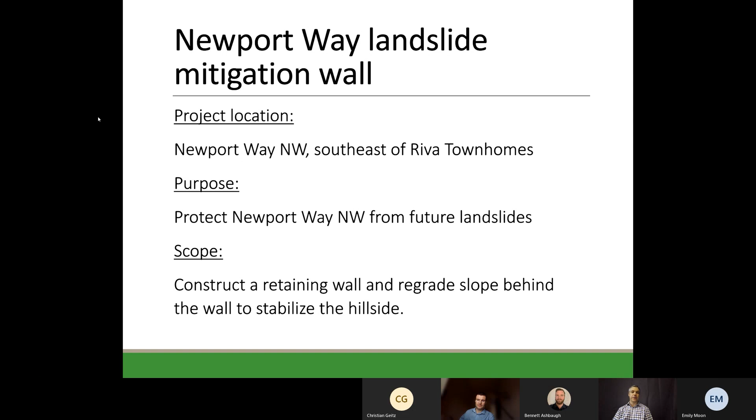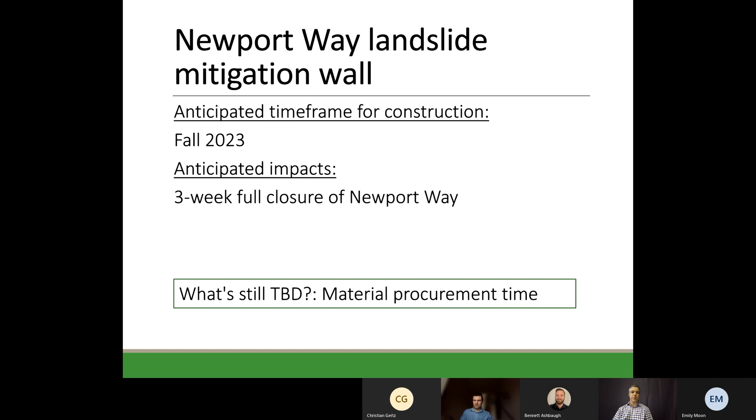Currently, the city is designing a project that will construct a retaining wall and regrade the hillside behind it to protect Newport Way from future landslides. Construction of the retaining wall is expected to occur this fall. During construction, a 3-week full closure of Newport Way is anticipated to be required in order to build the retaining wall. This schedule depends on the procurement of the materials needed.

This is a picture of the landslide in 2022 that closed Newport Way, which we're hoping to prevent with the construction of the Newport Way retaining wall.

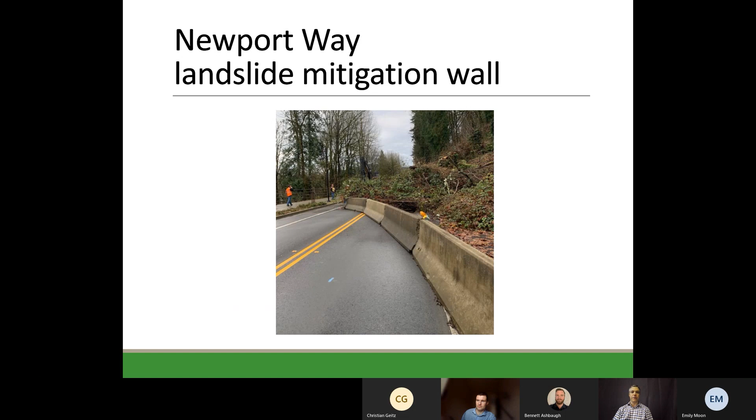Hi, I'm Matt Ellis, Utility Engineering Manager for the City of Issaquah. Tonight I'll be talking about the WSDOT Culvert Replacement Project. In the coming years, the Washington State Department of Transportation will be replacing non-fish-passable culverts and barriers along state-owned routes. This is required by federal injunction. Work will occur at 4 locations in the city, which I'll get to in a minute.

Work will impact I-90, SR 900, Exit 15 on and off ramps, Northwest Sammamish Road, West Lake Sammamish Parkway, Newport Way, and Gilman Boulevard. It will require new roadway alignments, new bridges, a roundabout at 1 location, new stream alignments, and relocation of city and private utilities.

WSDOT will be hosting an open house in the next few months. The date has not been scheduled yet, and WSDOT will be reaching out and providing a link to a website that will give specific updates for this project in the near future.

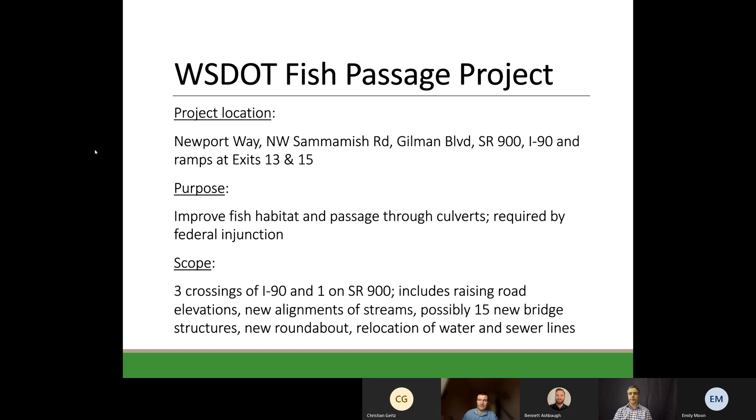The anticipated time frame for construction is open-ended, but right now they need to get all work done by 2029. So the plan is to complete all construction work between 2024 and 2029.

The impacts will be road closures, detours, and possible short-term utility impacts on all segments of the roadway, including the freeways, and on local streets including Newport Way and Northwest Sammamish Road.

What's still unknown: WSDOT has not yet selected a design-build contractor. They plan to do so in late 2023 or early 2024. Once a contractor is on board, we'll have a better understanding of timing and schedule. There are still a lot of unknowns and things we're working out with WSDOT, including design and construction elements and details currently being coordinated with the state.

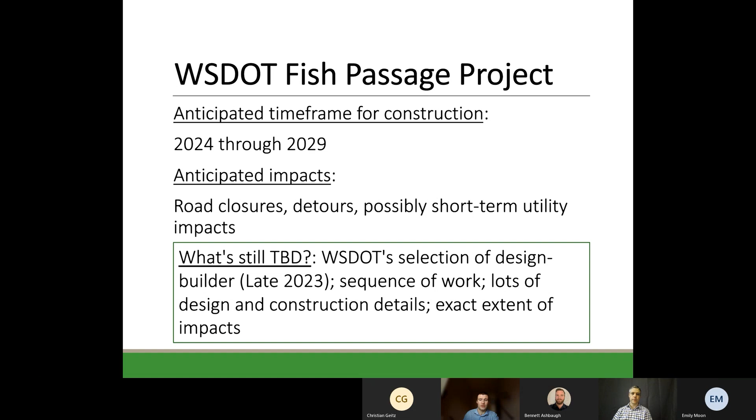Here are the 4 locations within the city. We have Newport Way on the west end. We have West Village Park and Schneider Creek right in the middle. We have tributaries to Tibbetts Creek, which impact both Gilman Boulevard and SR 900 and the on and off ramps right in the middle. And then at the very south end, there is a culvert replacement of Tibbetts Creek on SR 900, just south of the city limits.

So here's the first location.

This is the very preliminary design of the Lewis Creek culvert replacement. Right now, the orange line is the existing alignment of the culvert, and they are planning to replace that with 4 bridges: one on Newport Way, one on West Lake Sammamish Parkway, and 2 on the freeway.

To facilitate the design, you can see that the new stream alignment goes right through the old off-ramp, and they're proposing a roundabout at the Lakemont Orchard driveway to help facilitate the new alignment.

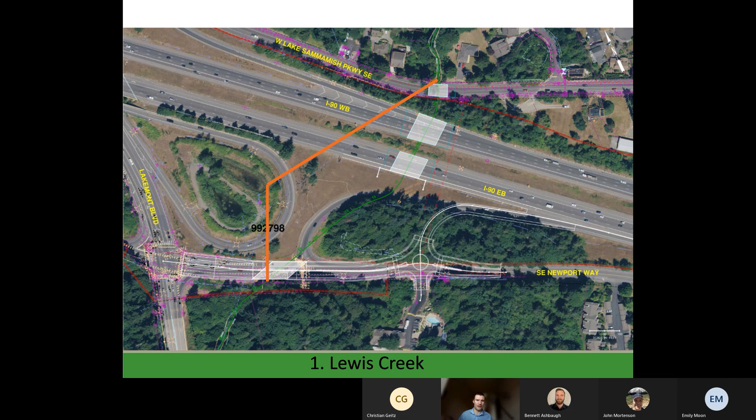This work will require change of use or realignment for our city water line, as well as the Cascade Water Alliance water transmission main, as well as other utility relocations.

Here's the second location. This is West Village Park Creek and Schneider Creek. The 2 orange lines are the existing alignment for the 2 streams. What they're proposing to do is put in a bridge at Newport Way for West Village Park on the east side, and then put a new stream alignment between Newport Way and the freeway for that creek.

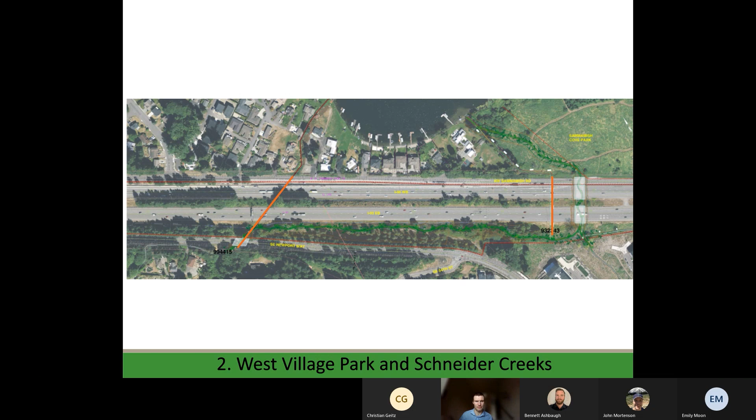That will then travel eastward to where it intersects with Schneider Creek, and the 2 streams will merge and go under the freeway and Northwest Sammamish Road before it outfalls into Sammamish Cove Park and enters Lake Sammamish. This work will require replacement of some water lines as well as a city sewer line, and will impact both Northwest Sammamish Road and Newport Way.

Here is the third location. This is the tributaries to Tibbetts Creek. This will have impact to SR 900, all the on and off ramps at that location, as well as I-90 and at 2 locations in Gilman Boulevard.

This one will have less impacts to utilities, but will have some major disruptions and impacts to traffic as they try and figure out sequencing. WSDOT has not quite figured out all the sequencing or how this will be phased. That will be determined with the design builder on board.

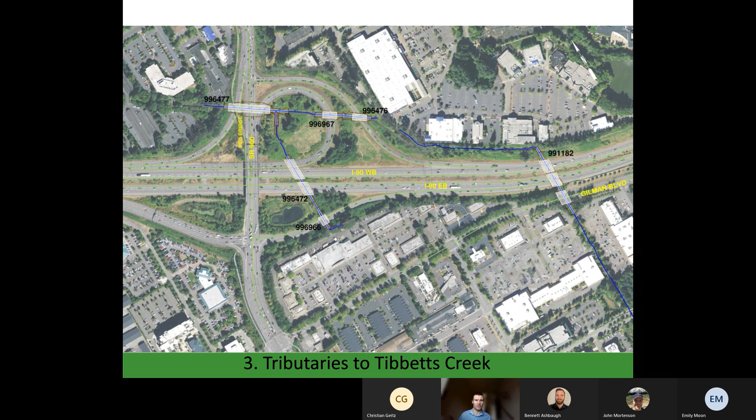As well as WSDOT utility culvert replacement projects, the city will be replacing a bunch of utility projects along Newport Way. Some of this will be for the WSDOT work, and some will be for city projects.

We will be replacing water lines from Northwest West Village Park Drive to Southeast 54th Street. We'll be installing a pressure reducing valve and intertie to the Bellevue Issaquah pipeline. The purpose of these projects will be to provide redundancy to Newport Way for water and improve fire flow, and reduce reliance on water provided through Bellevue.

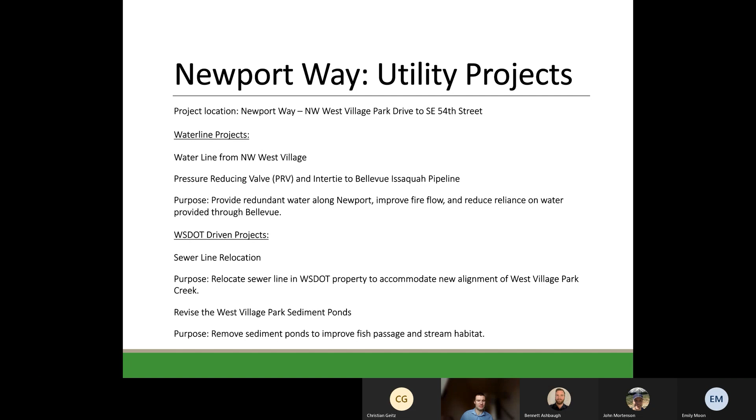There will also be 2 projects driven by the WSDOT culvert replacement project. We'll be replacing 1,400 feet of sewer lines currently located on WSDOT property next to Newport Way to help facilitate their new stream alignment. We will also be looking at replacing sediment ponds located on West Village Park Creek, adjacent to the outlet to Newport Way.

The waterline projects, we are anticipating to complete this work in 2027. The sewer line work for the WSDOT culvert replacement will be between 2025 and 2026, as well as the sediment ponds will also be in 2025 and 2026. We are anticipating single lane closures for all these projects.

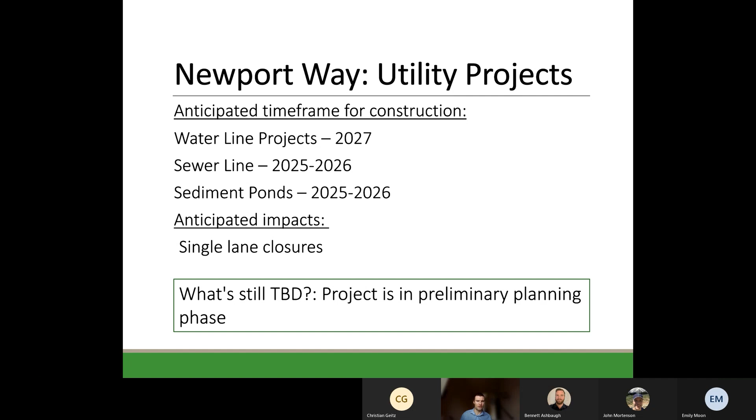Here is a picture of all the utility projects. They're kind of all in the same location. On the east end, we have Newport Way PRV and master meter. In the middle, we have the Newport Way water main replacement project. We also have the sewer line relocation right above the water line, and the sediment ponds right there at West Village Park Creek. The orange overarching image is the WSDOT culvert replacement work for West Village Park and Schneider Creek.

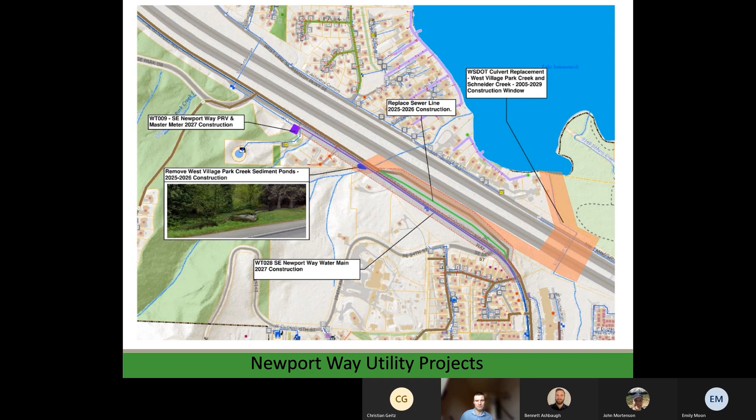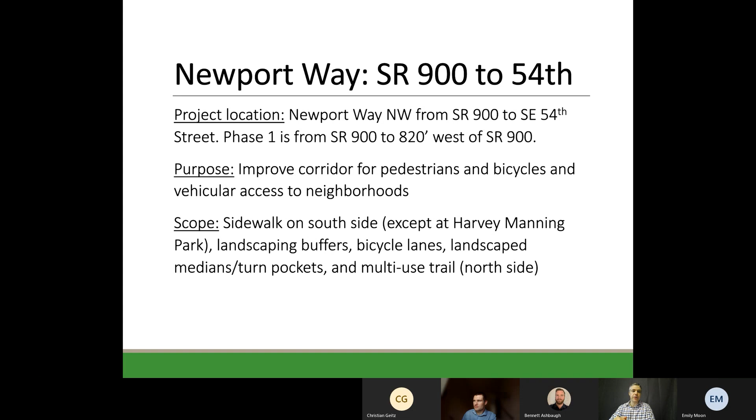The Newport Way project, located between SR 900 and Southeast 54th Street, is a corridor project. This project will improve Newport Way for bicycles and pedestrians by constructing new bicycle lanes, a multi-use trail, sidewalk, and planter strip to separate the pedestrians from the vehicles. This project will also improve vehicular access to neighborhoods with a new center median and turn pockets.

The next project is King County's Precipice Trailhead, also known as the Big Tree Ridge Trailhead. This project is located on the Cougar Mountain side of Newport Way, approximately a half-mile northwest of SR 900. This project will construct a parking lot for trail users to access the trail system. Construction of the new parking lot is expected to begin in the second quarter of 2023.

Impacts during construction include no access to the trailhead during construction and intermittent impacts to traffic on Newport Way, with flaggers controlling traffic and single lane closures. The item that still remains to be decided on this project is what the permanent restroom facility will look like. Here is a map showing where the new trailhead parking lot will be located.

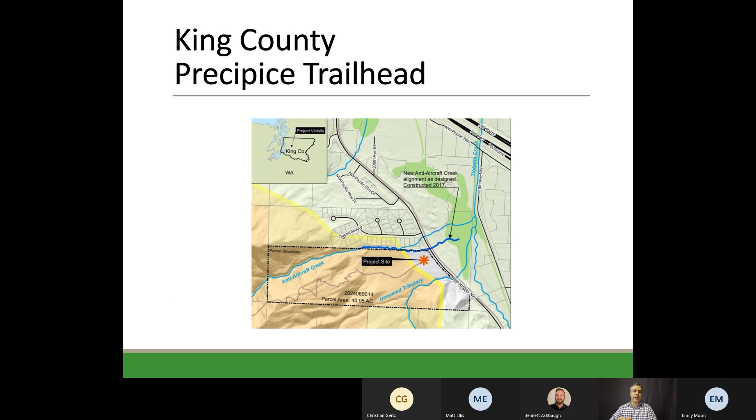There's two private projects that I'll be discussing with everyone tonight. The first is the Milano apartment project. This is a new 104-unit proposal located on Newport Way Northwest, approximately 1/2 mile from SR 900.

The project is located on the south side of Newport Way and consists of a 7-story building, comprised of 5/2 construction—that's 5 stories of residential over 2 stories of a parking garage. The parking garage consists of 90 on-site parking stalls. There's an internal roadway, frontage improvements, and stream and wetland buffer mitigation.

The applicant is currently finalizing their application materials, and building permits should be submitted within the second quarter of 2023, with construction to commence in 2023 or 2024, depending on permit approval timelines.

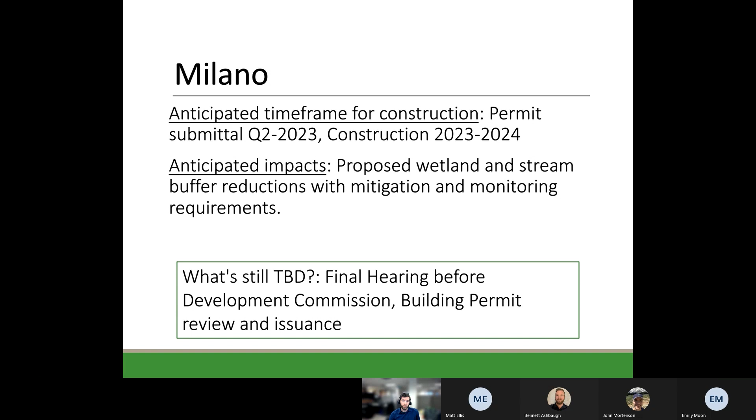The project incorporates proposed buffer reductions of both stream and wetland features located on the site, along with various buffer mitigation measures as required by city code, plus monitoring and maintenance. Still to come on the review and decision side is a final hearing before the Development Commission, as well as building permit review and issuance.

This slide identifies the project location just south of the Wolf project along Newport Way Northwest, with an isometric view from the southwest looking north to the northeast. This perspective shows 5 stories of the front facade facing Newport Way Northwest, with the site sloping down away from the right-of-way for a full 7-story exposure on the opposite side of the building.

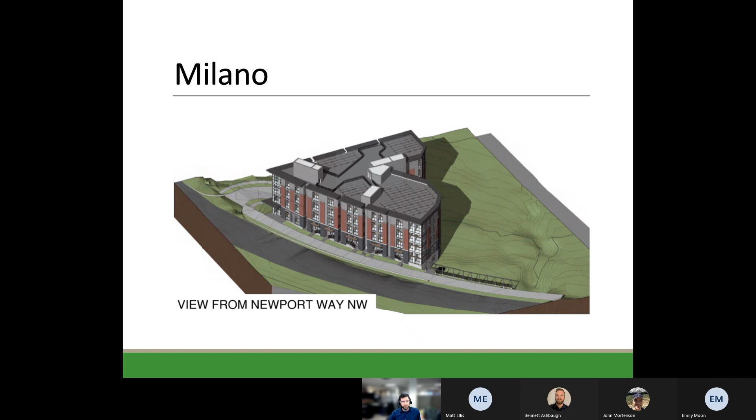The Firs at Talus is the second project in the neighborhood. This is a 19-lot subdivision proposal located along SR 900, approximately a quarter-mile south of Newport Way, within the extent of the Newport neighborhood at its very southern portion. The project is located on the west side of SR 900 and consists of 19 single-family lots, with a new private roadway serving the homes and various open space tracts proposed.

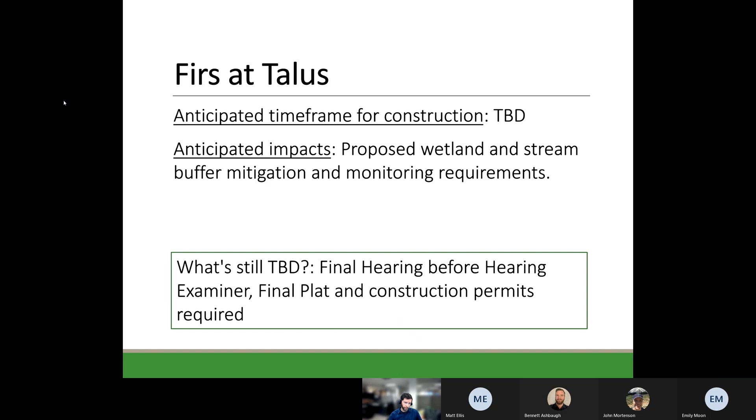Preliminary approval on the subdivision has been issued. The project incorporates wetland and stream buffer mitigation and is observing all buffer and wetland boundaries with no reductions proposed. Still to come, a final hearing before the hearing examiner on the final plat is required and anticipated within the next few months. Following that, site work and individual building permits are anticipated in the next year.

Project information for all current projects can be found on the Community Planning and Development webpage under our active projects list.

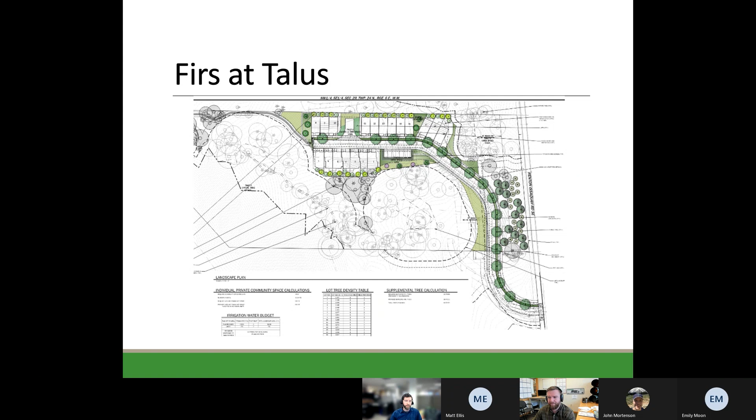The Pavement Management Program and the Concrete Maintenance Program are annual maintenance projects that repair existing asphalt and concrete infrastructure. These programs focus on extending the life of the pavement and concrete through maintenance projects such as placing new asphalt overlay, performing crack sealing, mitigating uneven concrete panels, improving drainage, and updating existing infrastructure to new regulatory standards.

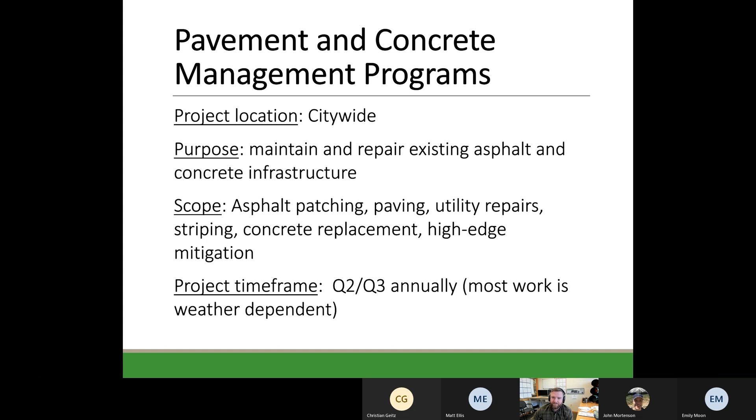Many of these projects must occur in dry and warm conditions, which limits them to the second and third quarter of each year. The projects identified within the various Newport neighborhoods by these two programs are currently scheduled between 2025 and 2028. Fortunately, these maintenance projects typically have short durations, which means that while there may be significant impacts to residents at times, it's short-lived.

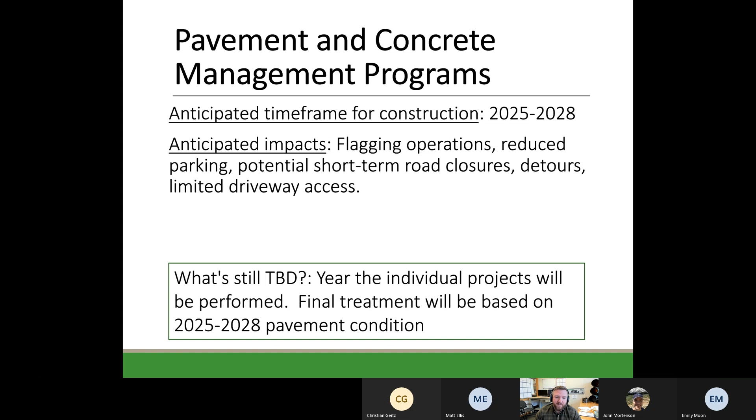Such impacts could include limiting curbside parking, one-way flagging operations, detours, and limited driveway access. While these projects are identified by the programs for repair in the next 5 years, the specific year of maintenance repair has not been identified at this time.

This map depicts currently identified projects. Please note that there will be ongoing standard maintenance projects occurring in spot locations by both the concrete maintenance program and the in-house street operation crews. An example of this work may be high-edge mitigation, where there's uneven concrete panels, or other smaller repairs with limited impact to residents.